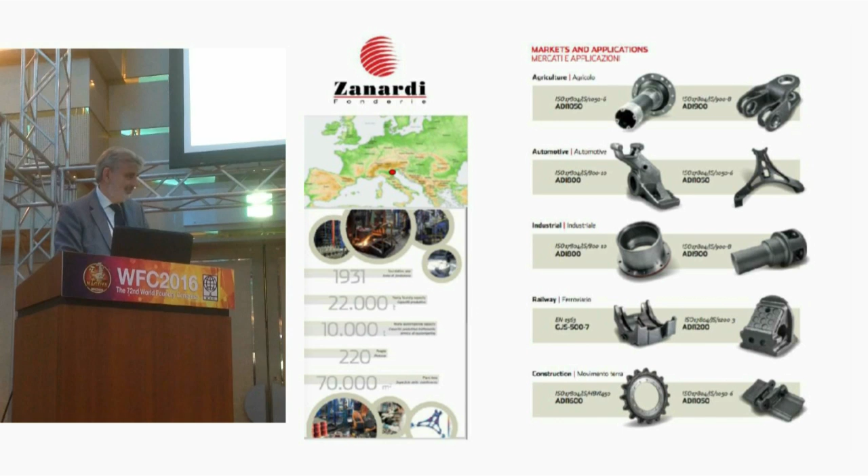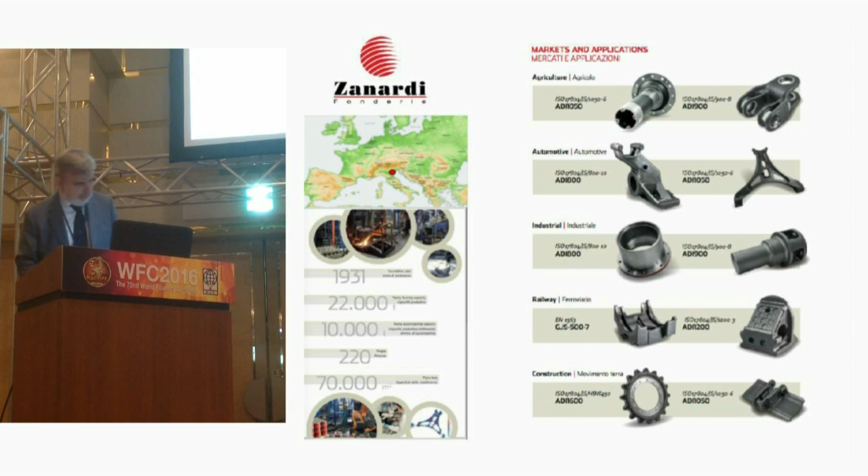Thank you very much. Good morning and thank you for listening. My name is Franco Zanardi, I'm coming from Italy and I belong to the Zanardi Fonderie organization.

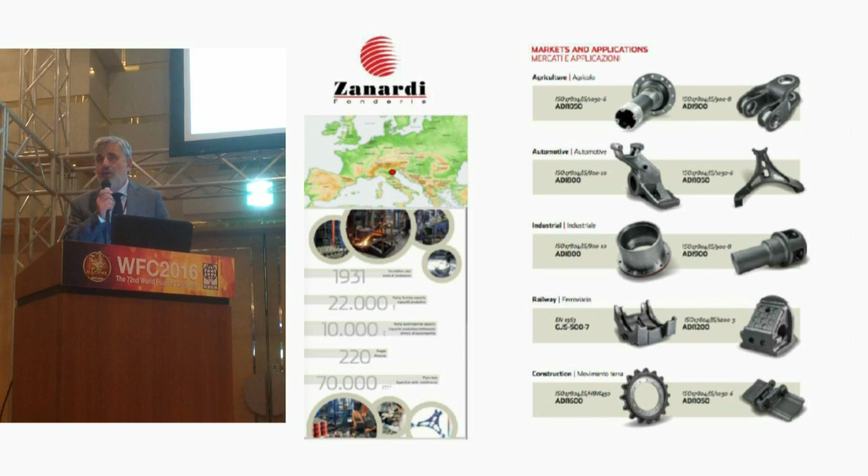Our company is a specialist since 1982 in developing ADI materials. The aim of my presentation is to give a contribution for a more modern approach to the definition of standards, because what we have now as international official standards are very poor in comparison with what ductile irons are really able to give. Co-authors are professors of our universities in Italy that are cooperating with us on this field.

So in fact, some non-conventional standards do exist. In the yellow row, you see the high silicon grades. In the middle, you see the as-cast SiBoDur of Georg Fischer and our IDI, that is a patented material quenched in a salt bath but without alloying, and Fiat standards that have existed since the 70s, and also at the end the as-cast SiBoDur, the grade 700.

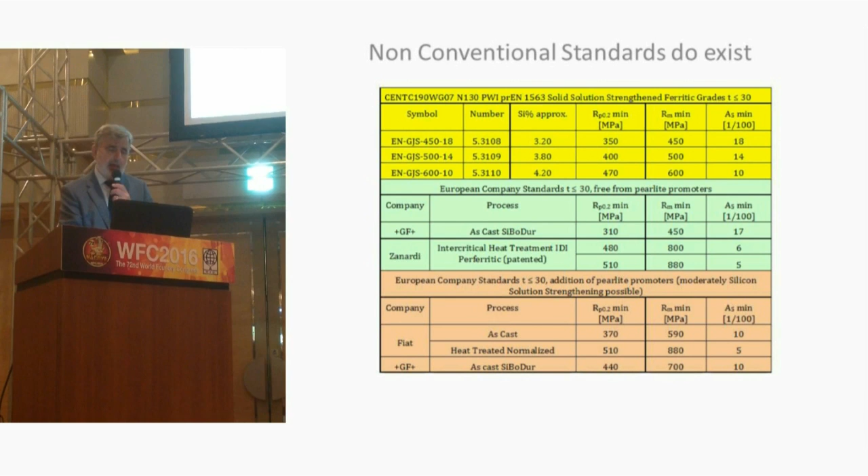When we are talking about the treatment of ductile irons, we have two approaches. The first approach, IDI, is where we start from a ferritic unalloyed conventional ductile iron that you can machine before the treatment at 150 Brinell hardness. Then we make austenitization in the intercritical range, as Professor Nofal told before for IADI, and so we leave some proeutectoid ferrite in the matrix.

Then the austenite in the casting is quenched into a salt bath. Being unalloyed, we cross the pearlitic nose, obtaining a matrix of ferrite-pearlite that is interconnected with no isolated islands of ferrite surrounded by pearlite, and very importantly, we have no copper or tin segregating at the grain boundaries.

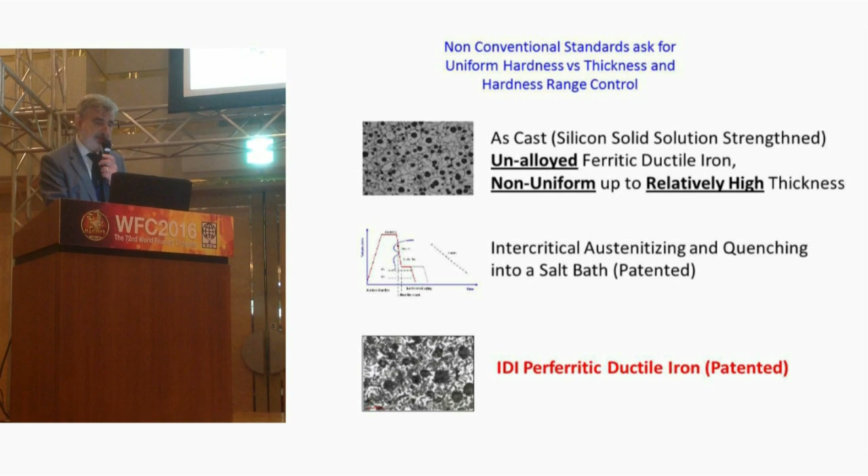The conventional salt bath treatment is the one for ADI, where we start with low alloyed ductile iron in order to give the hardenability to be quenched, avoid the pearlitic nose, and then cross the ausferritic nose, obtaining the well-famous ADI, the ausferritic ductile iron.

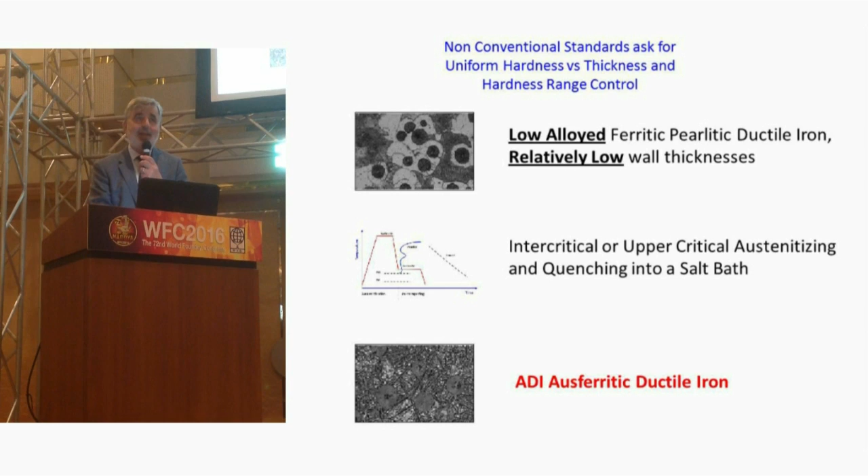As I told before in the last presentation of Professor Nofal, it is machinable, provided it is done in the right way. This non-conventional standard can be best fitted with the black line on this diagram, elongation versus ultimate tensile strength - one line for pearlitic ferritic grades, and on the right the austenitic, ausferritic grades. The green lines represent the conventional standard that you find in the ISO standard.

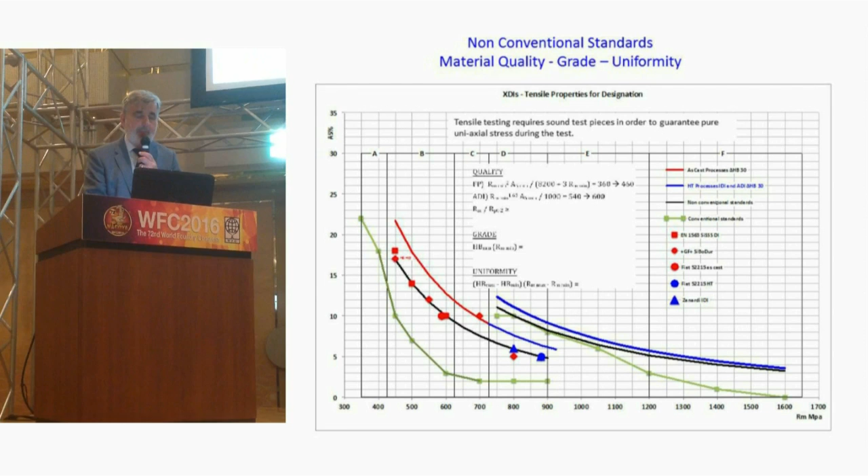Of course, when we are talking about non-conventional standards, such as high silicon or SiBoDur or our IDI or Fiat grades, we are obliged to fulfill the requirements of these grades, so that the point represented by A5 and RM is above the black lines.

And if we want to be allowed on our castings to have a Brinell hardness range of, for instance, 30 Brinell points, to be able to do that, our couple of A5 and RM should be above the other line, the red one on the left, representing the as-cast material, and the blue line for IDI and ADI representing the heat-treated material.

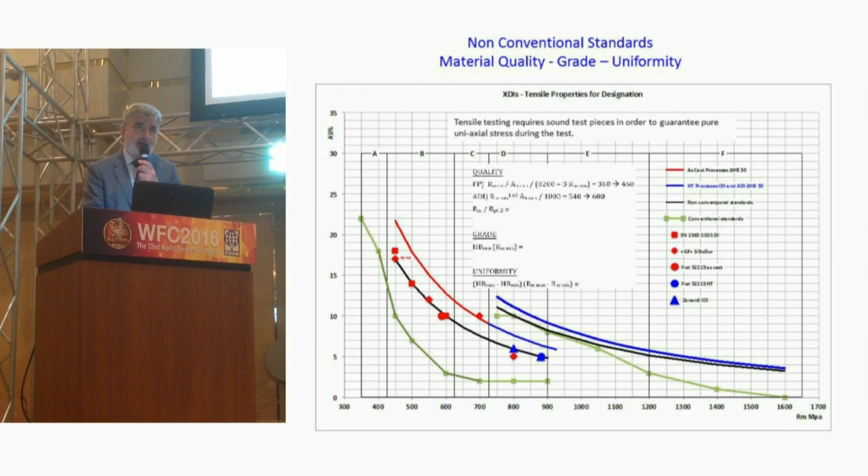This line guarantees the ability to fulfill the minimum properties and have a Brinell hardness range of around 30 Brinell points. So one way to specify the material is to use a quality index, a combination of tensile strength and elongation, that ensures you are in this region. Specification should be done by material quality index, grade - the minimum strength or minimum hardness on the casting - and uniformity, the Brinell hardness range the designer allows on the casting.

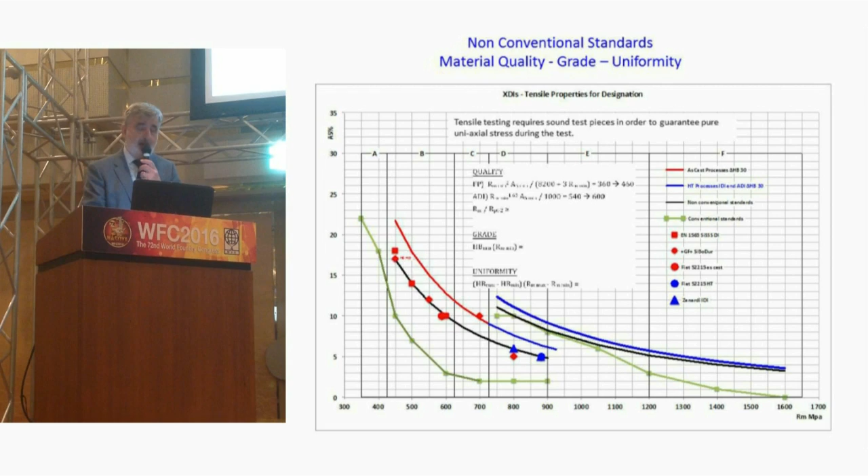So this is what I said before, how I suggest to specify the new grades for the standards: specify minimum hardness or minimum strength, the quality index, and the uniformity.

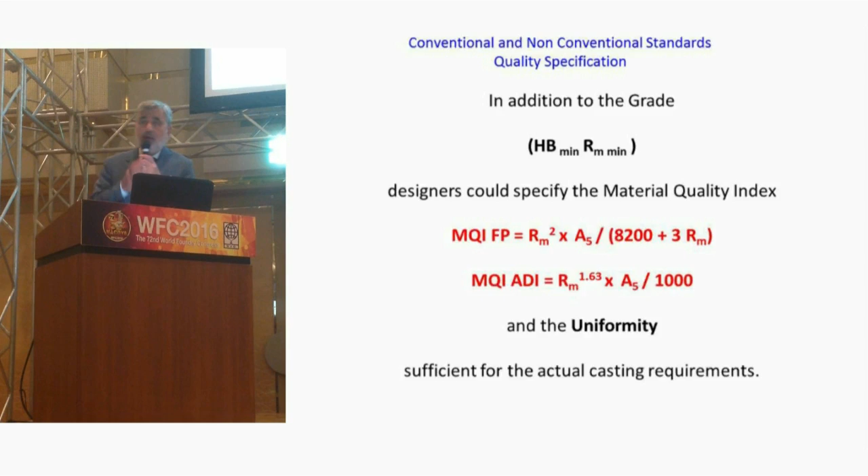Then we go to the field that has been explained well in another presentation, that is defect tolerant design. An imperfection, a defect in our casting, has a very different effect if we are talking about high plastic deformation or if we are talking about fatigue.

I suggest that when we are considering large deformation, as in the tensile test, we should not use test probes with defects, as sometimes found in castings, as a material quality test. This would be a test of material quality and defect at the same time.

Whereas when we are talking about fatigue, fatigue is a local property. If I have a failure on one side, independent of the other sides, this will make the crack start, and so the fatigue will be affected across the casting.

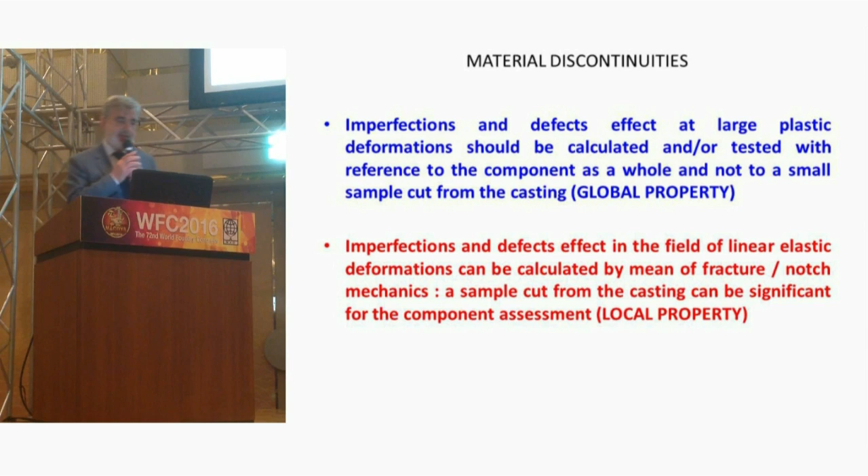This is simply a comparison of the Paris curve - the blue one of ADI tested with our material in the Padova laboratory, and the red one, the Paris diagram of the best steel used for making high-speed trains.

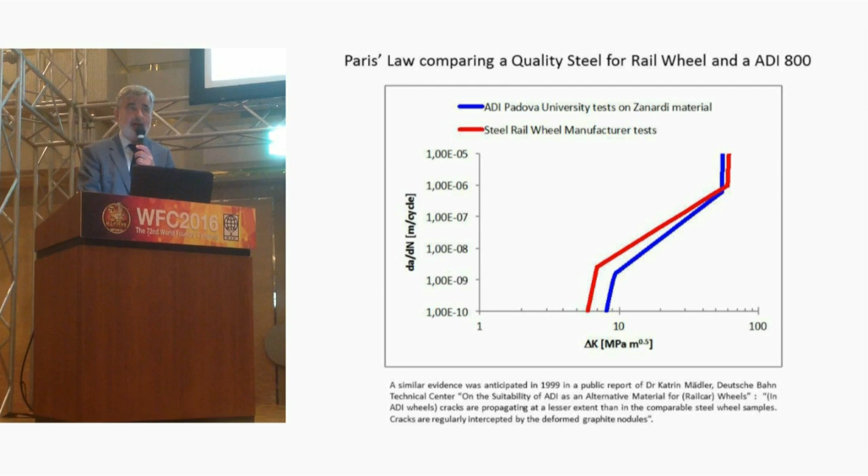You see how ADI competes very well in the crack propagation rate because of spheroids. This was also recognized by Deutsche Bahn in the early 1999.

So it is important to consider that fracture mechanics applies to cracks, and we have the values of the threshold stress intensity factor, delta KTH, from the previous presentation, for non-propagating cracks under cyclic loads, and the fracture toughness K1C.

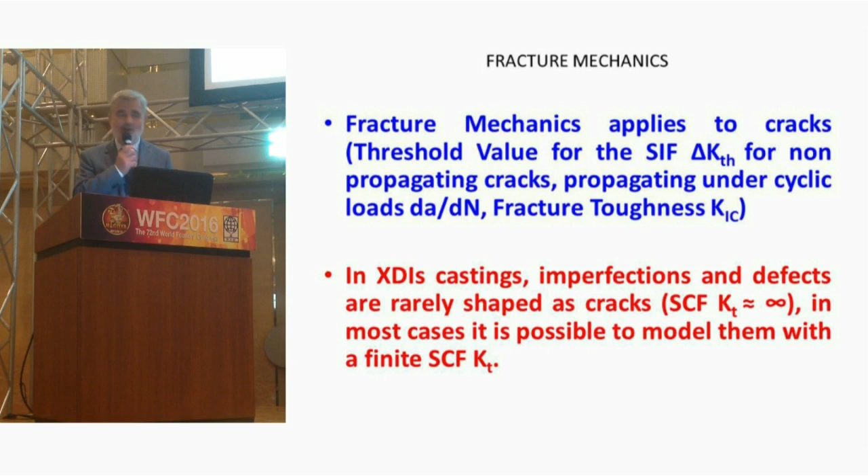In XDI castings - I use XDI to mean every kind of ductile iron, normal, pearlitic, ferritic, silicon, or austempered - imperfections and defects are rarely shaped as cracks, as happens in steel. So the stress concentration factor KT could be not infinite, could be at a limit, could be calculated or assumed. This is very important.

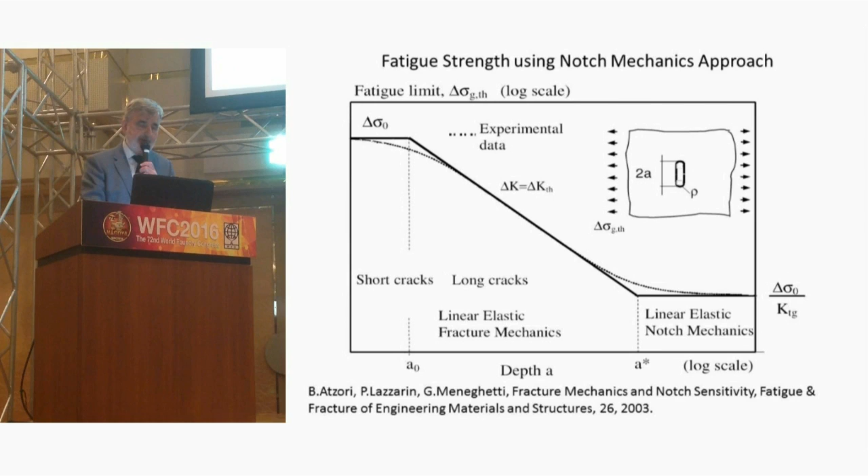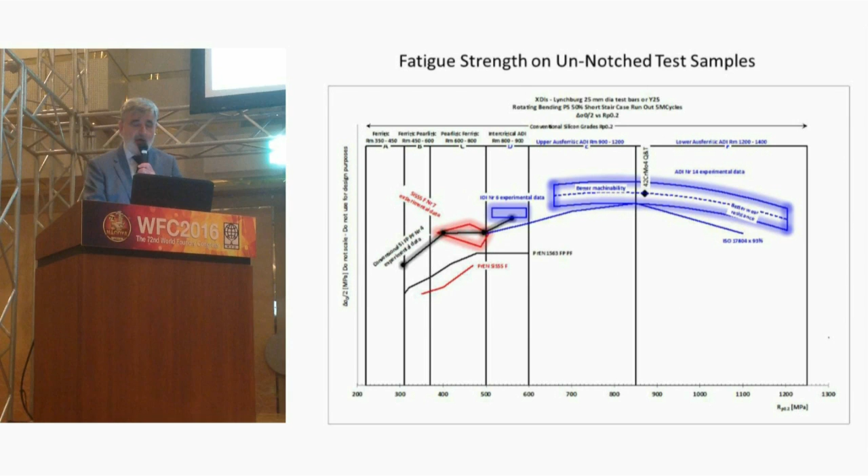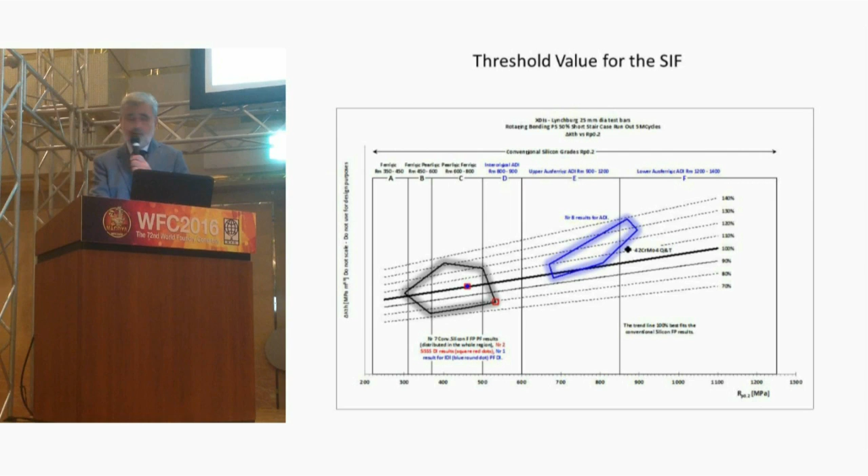This diagram represents our experiments on all the iron we tested, from ferritic, high silicon ferritic, ADI, to ausferritic ductile irons. The fatigue limits are un-notched, and this is also delta KTH, the threshold value for the same material. We always run the same test with a 42CrMo4 quenched and tempered steel, to ensure the same procedure is applied to the comparison steel.

Instead of the Charpy test, we propose that a constitutive curve be used, because this will be much better for the component itself when testing at high plastic deformation.

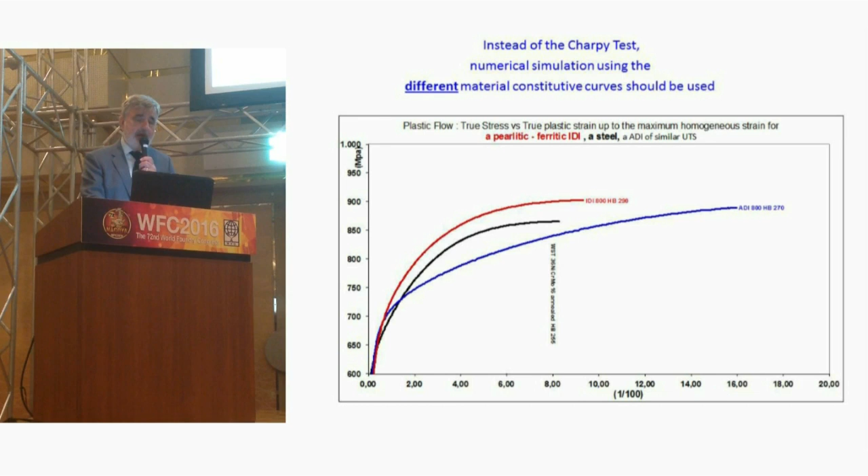These curves can be described by the Voce approach that we are now using at our company, to give a numerical value to the shape of the curves, also for process control.

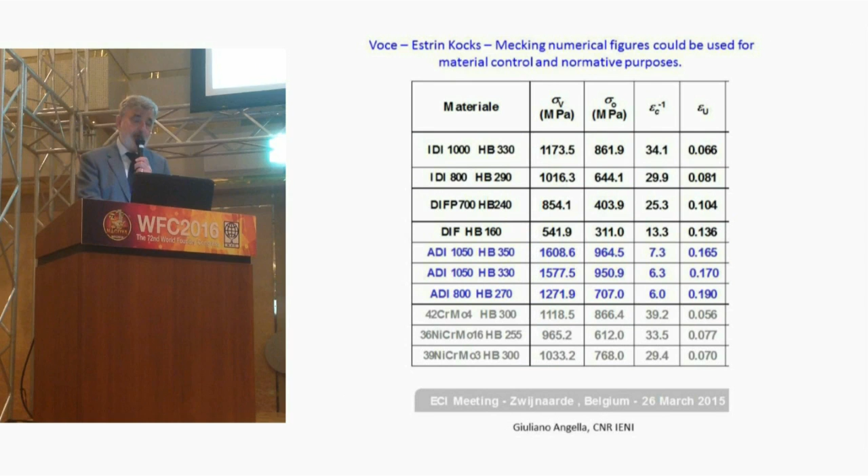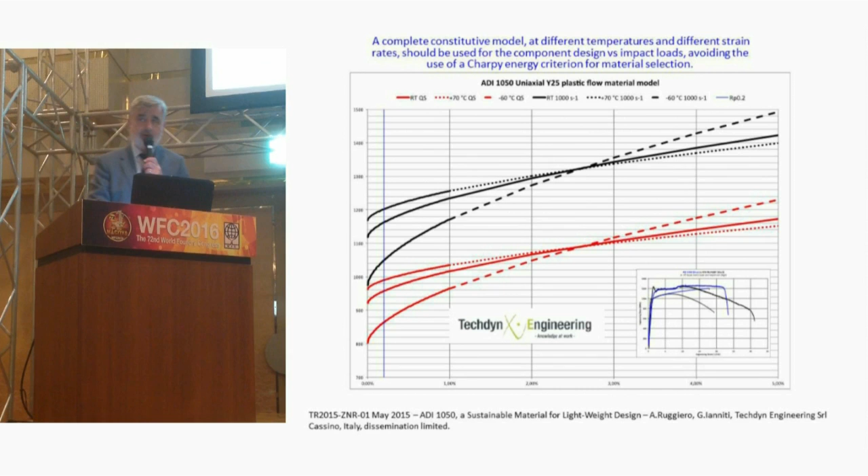This is a representation of the complete constitutive curve that we developed with Cassino University in Italy, Professor Bonora, using ADI 1050, where we tested at quasi-static and Hopkinson bar conditions, 1000 per second strain rate, at different temperatures: -60, +70, and room temperature.

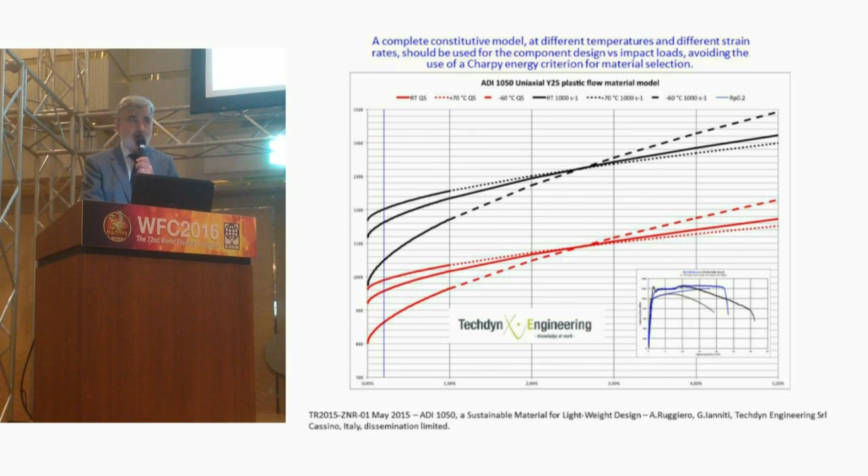This enabled us to design our castings for shock and high impact loads.

So my vision is that the tensile test of a separately cast sample from the casting test probe shall show a quality index above a specified limit, as I showed before.

The position in the casting where to cut the test sample should be left to the discretion of the manufacturer, to ensure it will be sound. But designers should be allowed to ask for fatigue tests using a test sample cut from the most critical position in the casting.

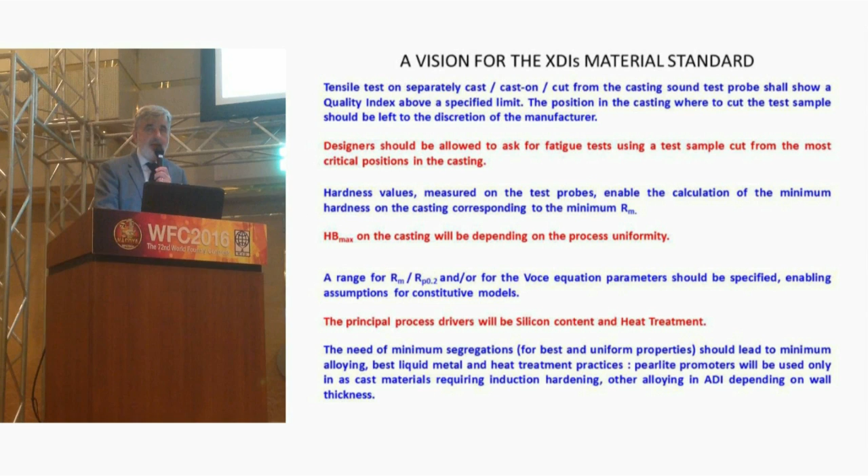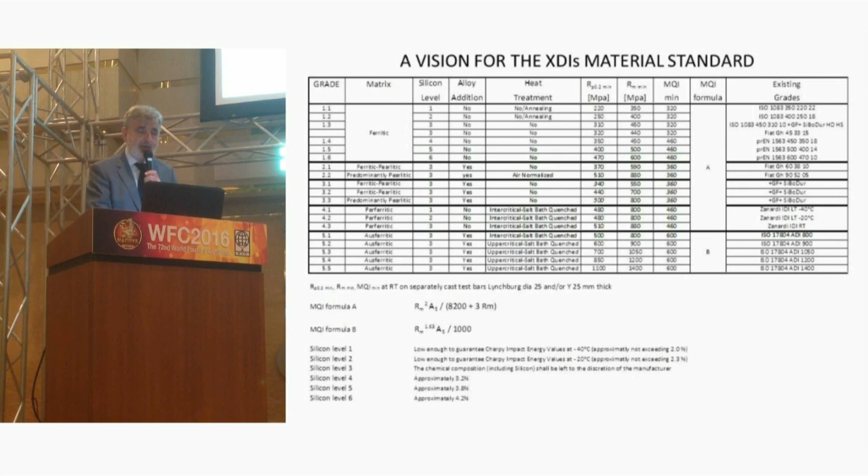Hardness values measured on the test probes will enable us to determine the minimum hardness able to guarantee the ultimate tensile strength, and the shape of the curve should also be well described by the numerical values I mentioned before. These are represented in our presentation as my proposal for new grades defined with this approach.

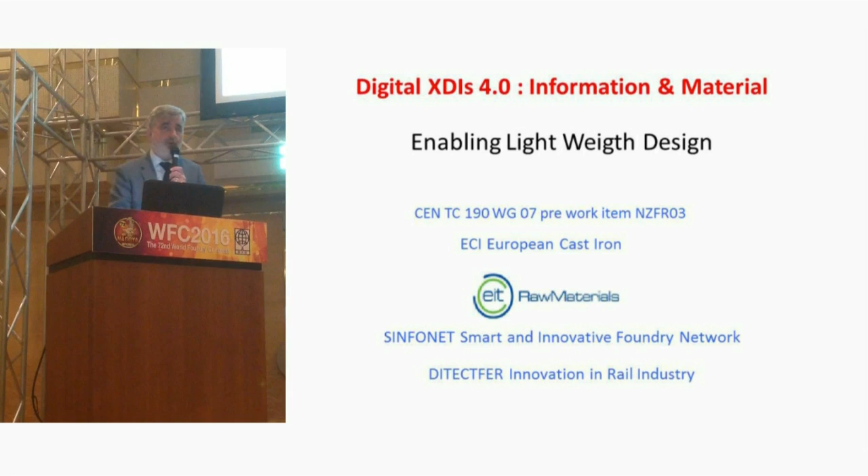Thank you very much for your attention. This is a list of situations where we are cooperating with other people in the field of the European community for research in this area and for support of pre-normative work. Thank you very much.

Thank you, Mr. Zanardi, for your presentation. Any questions from the auditorium? So, that was a lot of information on one point.

Maybe one question. You discussed some problems with small cracks or something - what is the influence of inclusions? Do you have any idea how to handle inclusions?

Yeah, we normally cooperate with our customers in co-design using the Murakami approach. So we define the defects that are allowed in a given section, with their shape, and we define the square root of area perpendicular to the principal maximum stress. With this, we transform the defect into an equivalent crack, and we use our Kitagawa diagrams modified by KT to evaluate the expected fatigue strength in the presence of defects, at a probability of survival of 50%.

Then we have our T-sigma for the dispersion, and so we calculate using this diagram with our customers. Okay, some other questions?

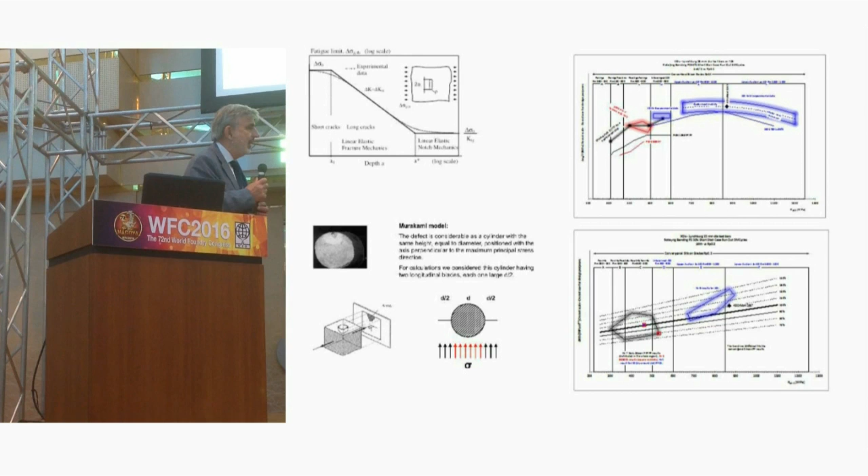The first step, I presented a document called NZFR, that is my code 03, to the CEN committee, CEN TC 190, working group 7, which is now reviewing the CEN standard. This has now been submitted to our colleagues, and should be a document that will improve the new standards.

At the same time, in Italy, with our UNCIDA standardization body, we started to work on a new national standardization effort in Italy to speed this process along.